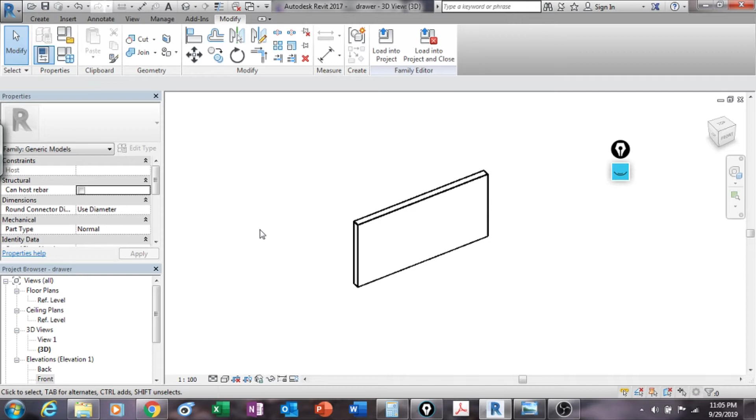So let's start working on it. This is fine. Close this. Okay, so start a new family, also a generic model. Open.

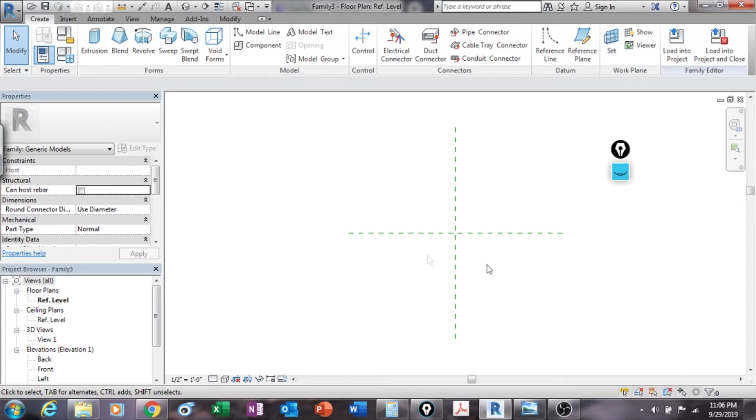Go for it. Figure out the dimensions for this thing. Maybe I want to make this 1 centimeter, and then the height, maybe 3 centimeters, something like that. It's always important—you can always go look for the specs if you have them available.

Great, let's go and find the spec. We're gonna have to eyeball this thing. Gonna make it maybe 1 here, maybe 3 here, and the length—since the door is 660—maybe we make this 400, right? So we have 400, we tested. Maybe if it doesn't work, we can always go back and very easily modify this thing.

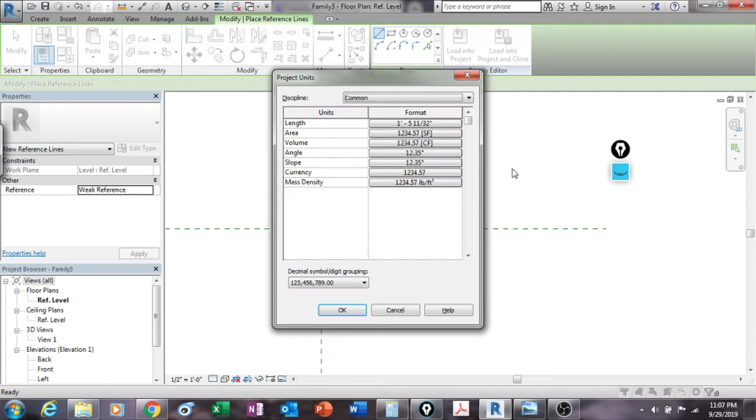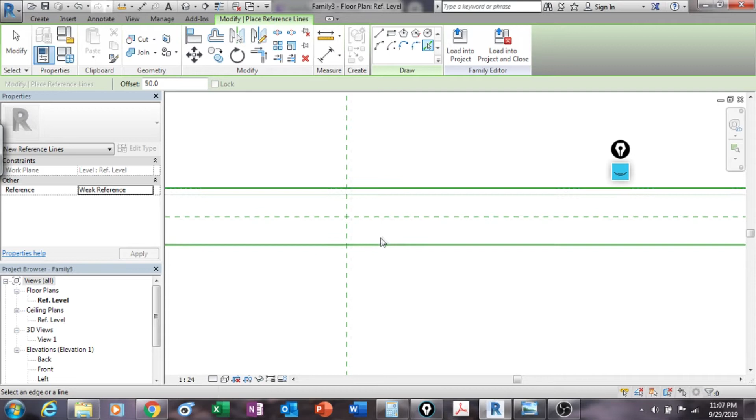So let's go to the top. I'm gonna start creating reference lines, sorry, always the same—make sure you're working in millimeters. So change to millimeters, not centimeters, millimeters. Okay, here, get closer and add a 50 here, and go top and bottom. Actually, it's all the way around.

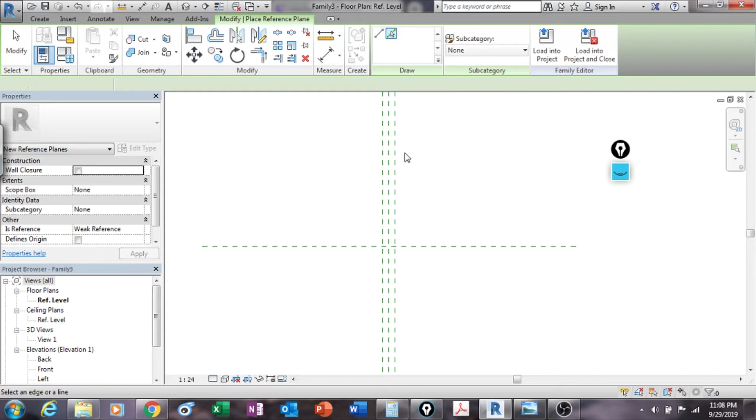You want to make it this—I mean, you still can make it horizontal, but then every time you bring it into the family, you have to rotate it. So let's try to save time here and make it the way it goes originally. So it goes here, here 15, one side, the other side. Good, so let's go 200 and 200 also, right? 200. Yeah, this needs to be 5, and this needs to be 5.

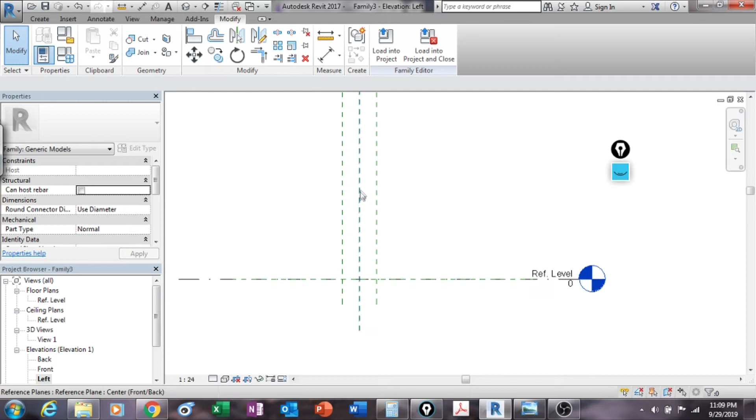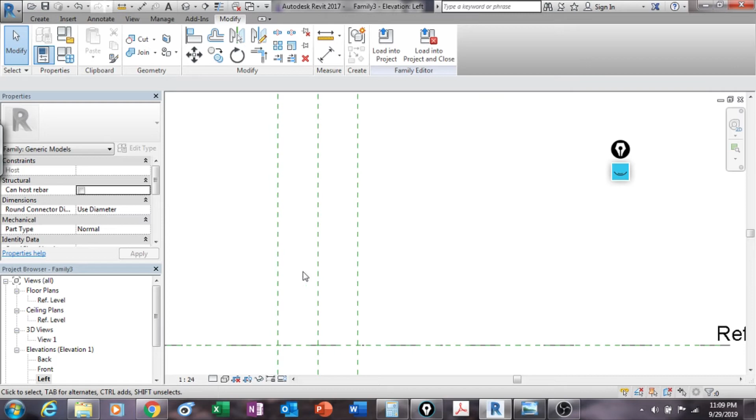So now we are talking. Okay, so now let's go to the left. I'm gonna build this way, because I'm gonna pretend that this is a cabinet, so I'm gonna build this way. How much do I want this to be here? Maybe 3 centimeters or 4 centimeters—3 centimeters each side is going to be fine, I think. This is very thin, so maybe 5 millimeters here, 3 centimeters here, 3 centimeters here. Probably this is 1 inch, right? It looks to me like it's 1 inch.

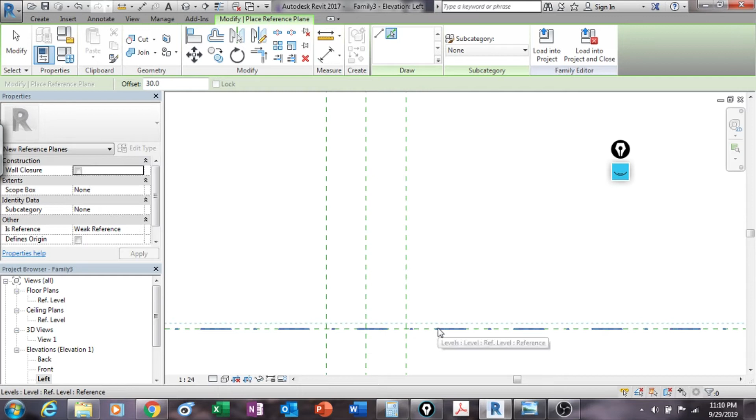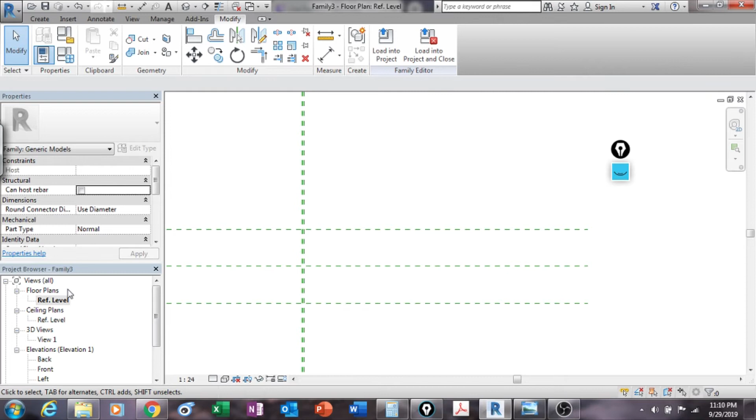So let's start it again, create some 30 millimeter lines in here. Okay, now I got lost. So this is the top view, so that's great. So now when you go to the left—and this is top view, right? This is the front, this is the back, this is the left.

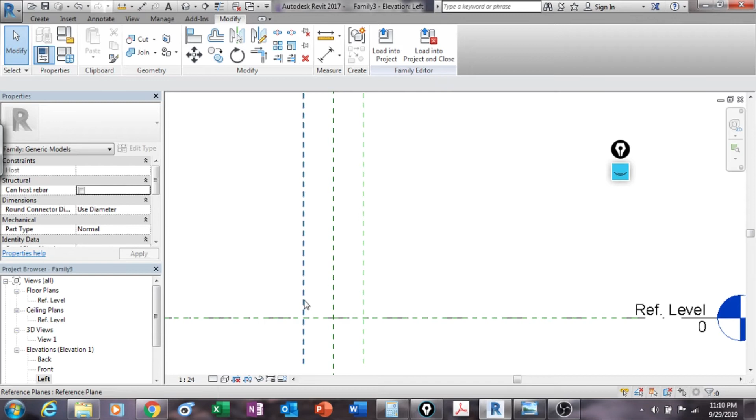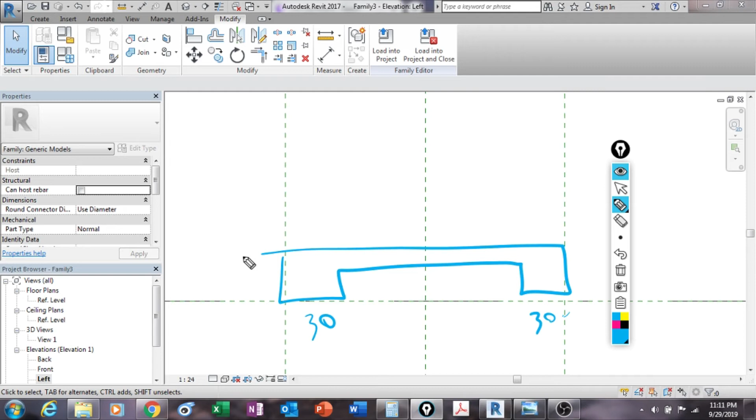Okay, let's go to the left. Okay, this goes this way. This is how we're gonna build it. So sometimes I get a little lost with this thing, I get a little lost. So this is how it's gonna go. Just lost my reference. Okay, so it's gonna make this 30 millimeters, 30 millimeters, and then we're gonna make this 5 millimeters, I guess. Let's do some offsets, do this.

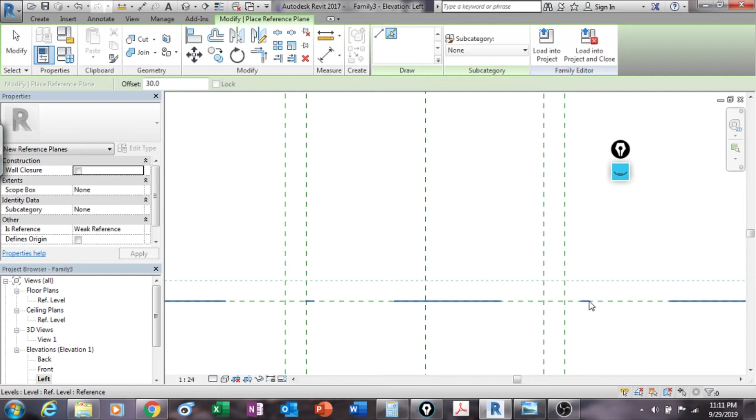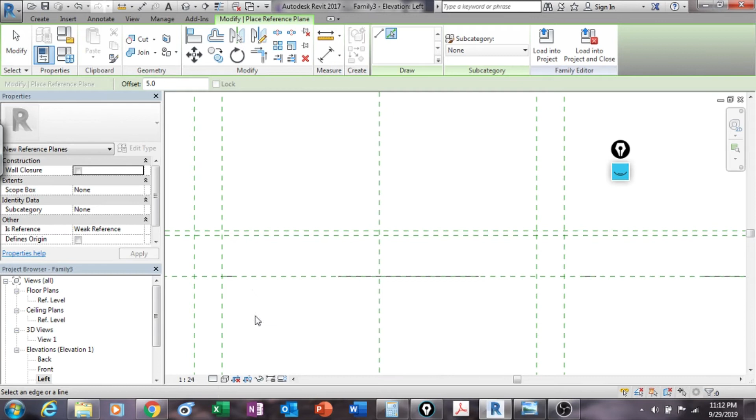How high do we want this to be? Also 3. Three centimeters doesn't seem to be... let's make this 5, just in case, 5 millimeters. Again, if you have the specs, just go from specs. Like that, and then also let's make this 5. I wonder if this is 5. That's okay, just gonna leave it like that, and then see how it works.

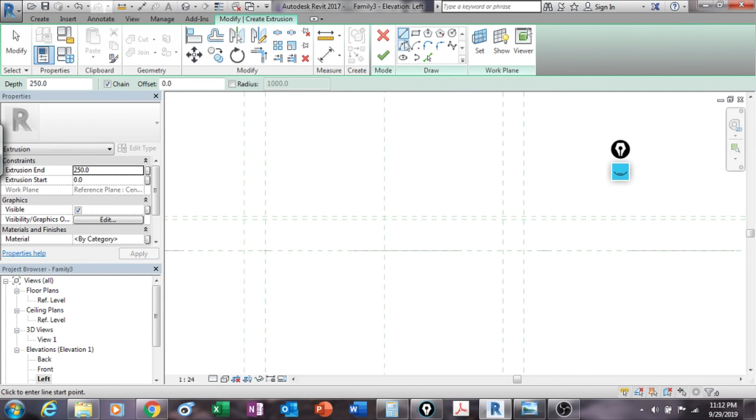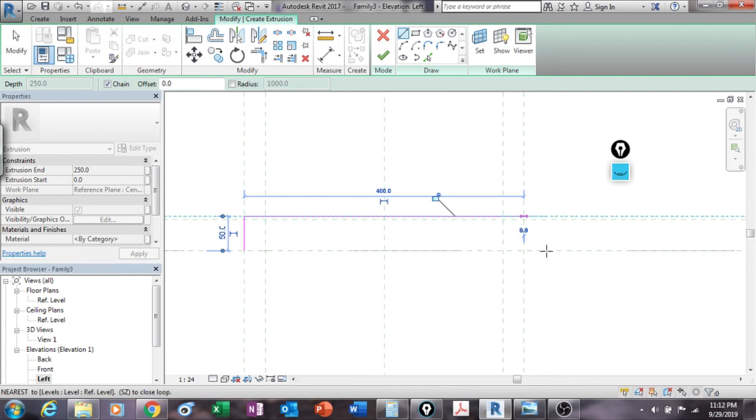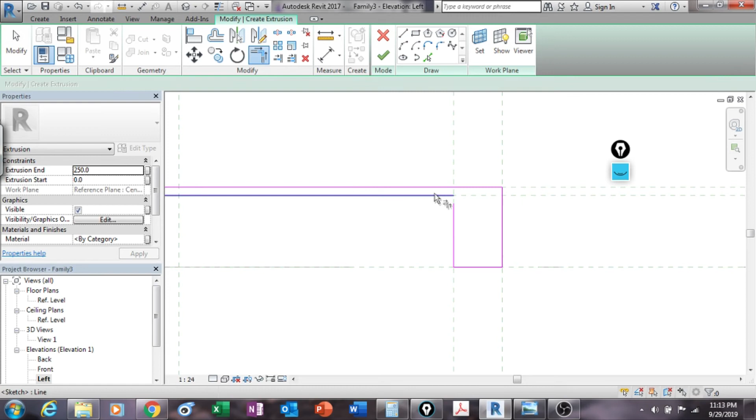Okay, so now that we are here, I guess we can trace this thing and create our handle, our hardware. So create geometry, just gonna use the line. Lock this. Okay. Finish there and make sure these 2 lines are meeting. Okay.

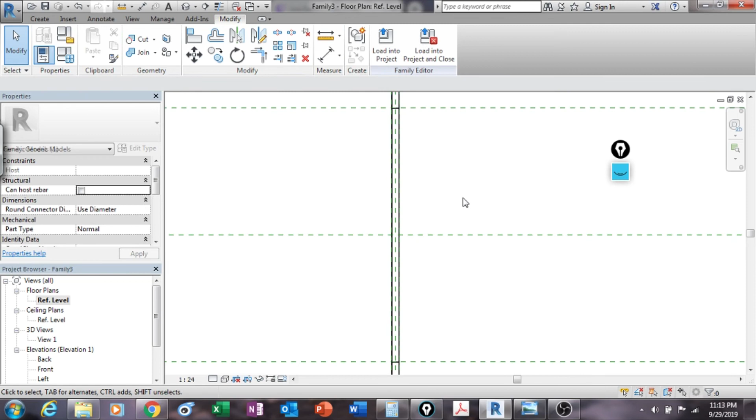Let me go to the top view and let me accommodate these things here and here. Do I need to lock or anything? I think it's not necessary. Maybe we'll figure out that later, whether we need it or not. So that's that. If it looks too big, we can go to view and deactivate the thin lines in the view, right?

I think it's very close to what this thing actually is. Again, if you have the spec, much better. So let me save this thing as door hardware. So here we have, in just a few minutes of working, quite a catalog right here. Save. And now what we will do is create the hardware for the drawer.

Back here is pretty much the same. I'm gonna keep the same proportion and everything, just gonna make it a little bit shorter. So the drawer is supposed to be—let's say this is 450. Okay, we're gonna go 450. If this is 900, right, this cabinet is 900, the drawer seems to be half, so it'll be pretty much 450.

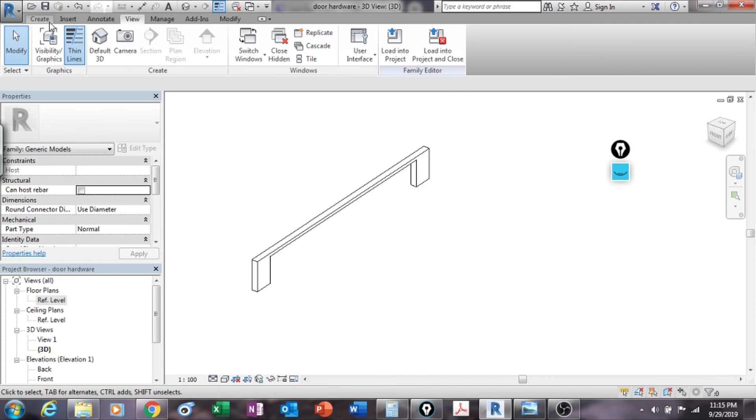So if this is 450, let's make this 300 maybe—yeah, we'll see, maybe it works, if not we can always go back and fix that. Make this 300, back here. So save this thing, and now I'm gonna save as. Okay, I'm gonna save this thing as a family, and I'm gonna call this drawer hardware.